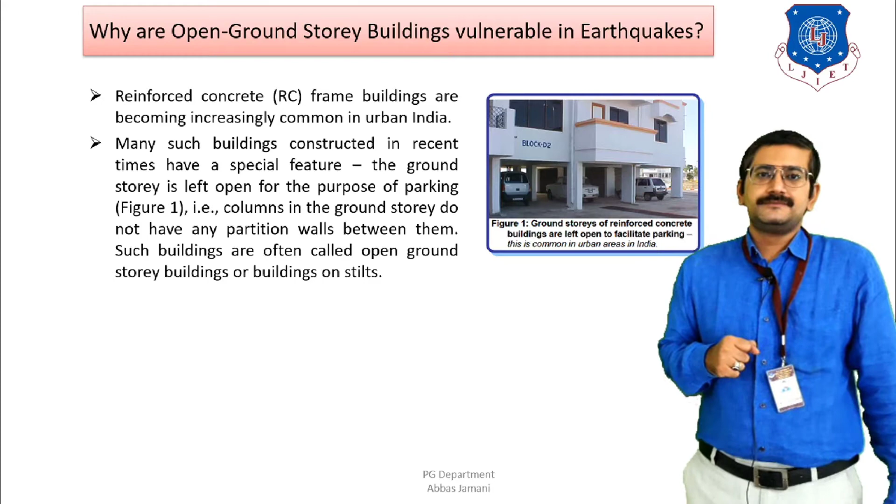Right. So when I talk about the open story buildings, history itself says that the performance of these open story buildings has always remained poor in case of earthquake. If I talk about the 1999 Turkey earthquake or the 1999 Taiwan earthquake or the 2003 Algeria earthquake, in all of these cases it has been observed that the buildings with open ground story have been vulnerable to earthquake, and as a result, a lot of buildings of similar geometry or similar type of planning have collapsed during the severe shaking of the ground.

Right. So this is a scenario that is observed worldwide. But when you come to India, at the local level, we can say that a large number of buildings are coming up day to day in the country as well as in the city. If I talk about Ahmedabad itself, it is said that approximately 25,000 five-story buildings are present, and around 1,500 11-story buildings. Now this is old data.

But if you look at the present situation, the buildings are either 7-story, 12-story or 14-story buildings, and now we even have 22-story buildings. And next we are going to have 30-story and 70-story buildings coming up, right? So a large number of these buildings are coming up on a daily basis, but all these buildings are going to have the same feature, that is, the open story at the ground level. Why? Because parking facility is to be provided, and when this is done, partition walls are absent in this type of buildings.

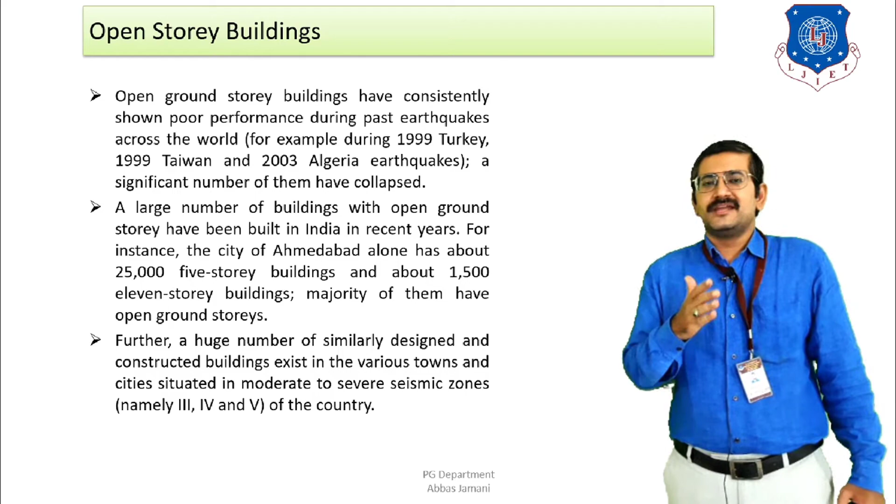I have given the example of Ahmedabad only, but similar types of buildings are coming up in other cities also, that is, buildings located in zone 3, zone 4 and zone 5. All these three zones are seismic prone zones, and any multi-story building with an open story at the ground level is going to be severely affected if not properly detailed or properly designed.

Right. So now what is the actual problem? That is what we are going to understand next. From function point of view it is okay, from elevation point of view it is also okay, but from structure point of view, what is the actual problem, as a result of which we are taking up this topic under the effect of earthquake loads today?

That is, the buildings which are going to have columns at the ground floor and columns and masonry walls both at the stories above are going to have two peculiar features. The first feature is that the ground story is going to be flexible in nature. Why is it going to be flexible in nature?

Because the amount of horizontal displacement that the ground story is going to undergo is going to be larger as compared to the stories above. Why? Because the stiffness at the ground level is going to be less as compared to the stiffness of the stories above. Because in case of the stories from the first floor up to the terrace level, the contribution of infill walls and the columns is going to be a combined effect, and as a result of that the stiffness above is going to increase.

Whereas in case of the ground story, only the columns are going to be present, and as a result the stiffness is going to be less as compared to that of the stories above. And as a result of that, the horizontal displacement is going to be larger at the ground level as compared to the stories above. IS 1893 coins this particular behavior in the structure as a soft story. That is what we have discussed earlier also, that soft story is one of the reasons why open story buildings cannot perform sufficiently in case of earthquake loads.

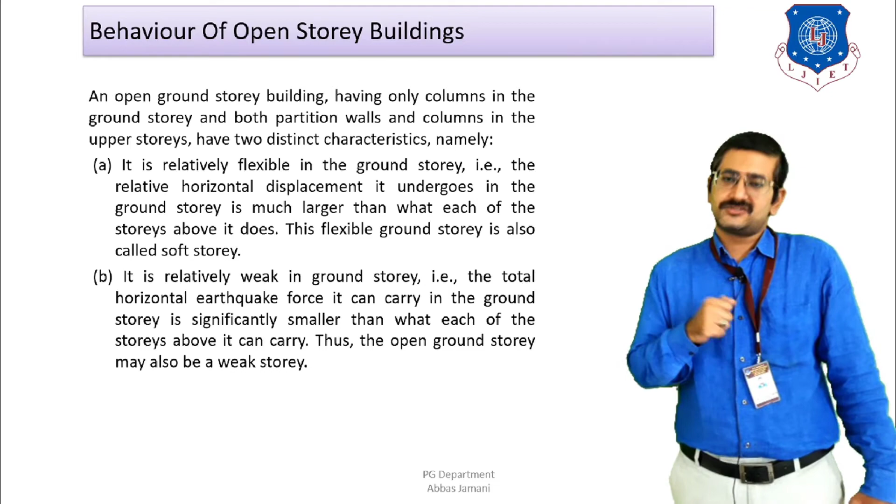Now, when the geometry is such that there are only columns at the ground floor, and from the first floor onward both columns and walls are there, the above stories are going to act as a single unit or a single block, and they are going to move together under the application of lateral loads. Whereas in case of the ground floor, only the columns are present, and the movement is going to be like that of an inverted pendulum, which we will see in the figure that I am going to show in the next slide.

So when these horizontal forces act on the building, the building is going to undergo horizontal displacement, and we have discussed that in case of lateral forces, reversal of stresses is going to be considered. That is, the earthquake force is likely to act in the plus direction and the minus direction as well, so there is going to be back and forth movement. This back and forth movement is going to severely affect the strength of the columns at the ground floor, and at the same time it is going to affect the ductility of the columns as well.

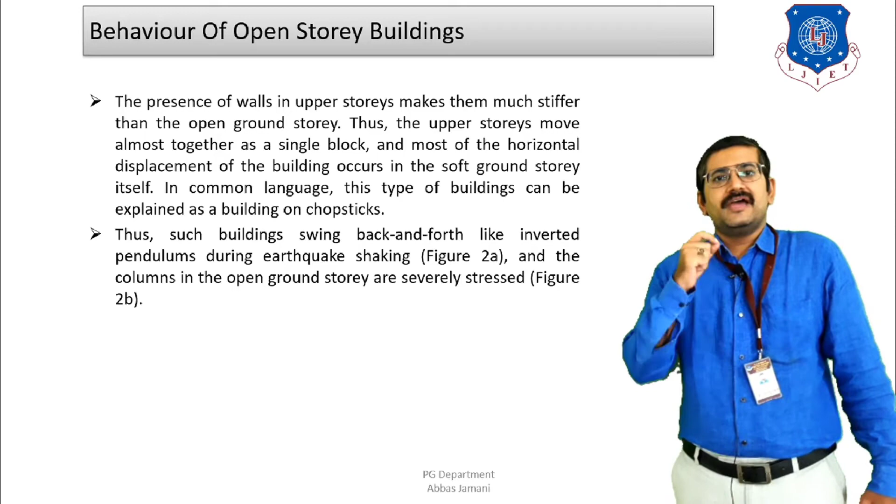So the columns are going to be severely stressed from ductility point of view and also from strength point of view when this type of geometry is seen in the building. As you can see in the figure over here, first the figure of an inverted pendulum is shown, where a single circular bar is shown, and on top of that the mass is shown.

Now if I apply a horizontal force on this pendulum, the stiffness of the bar is going to be different and the stiffness of the ball is going to be different. As a result, the heavier mass is concentrated at the top, so stiffness is going to be more at top, less at bottom. The behavior is going to be as you can see in the figure over here.

The same thing applies in the case of open story buildings. The stiffness at the ground floor is going to be less, and the mass is going to be more at the upper stories. So the stiffness is also going to be more at the upper stories, and since it is more compared to the lower stories, the behavior is going to be similar to that of an inverted pendulum, as you can see.

The upper portion of the block is going to act together as a single unit, and the lower portion of the building, that is the ground story columns, are going to be on the weaker side, and their flexibility is going to be larger compared to the portion above the ground story.

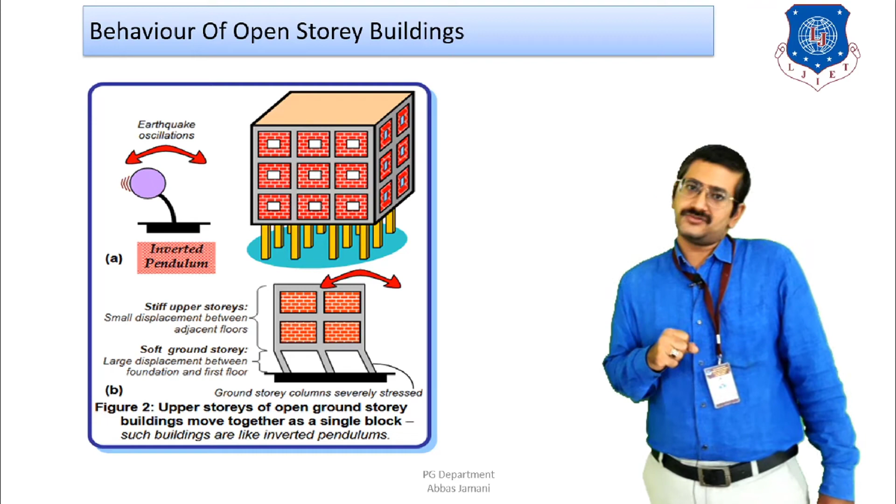Now when this happens, the demand on the column is that it should be capable of resisting large lateral forces. That is, the shear capacity of the column should be on the higher side. The second thing is, a good amount of ductility is also required.

Why? Because the ground story is going to be flexible in nature, and it is going to undergo back and forth movement. With that back and forth movement, large lateral deformation will take place in either direction. If sufficient ductility is not there, it will not be able to hold its position, and the collapse of the structure is likely to be initiated.

In the previous discussion regarding the performance of masonry buildings and RCC buildings, we have seen that the design of the column was critical in shear only. That is, the shear capacity of the column should be increased. But in the case of open story buildings, the criteria change. The columns need to be ductile in nature, and at the same time they should have good shear strength, to resist such a large change in the stiffness.

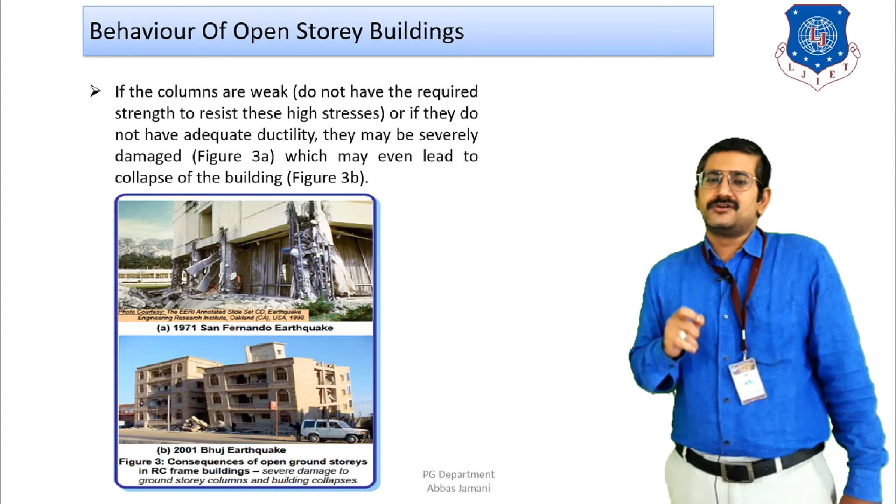Here you can see examples of the performance of two buildings in two different earthquakes. The first is a building that collapsed in the 1971 San Fernando earthquake, and the second is a G+3 structure that collapsed during the 2001 Bhuj earthquake. In both cases, the open ground story was present where the parking facility was provided, flexibility was generated in the ground story, the buildings could not perform well under lateral loads, and failure of the structure took place.

Now, where actually is the problem? One problem, as we have already seen, is the insufficient provision of masonry walls. If a sufficient amount of masonry or infill walls is not provided at ground level, it is going to create a problem. The second problem is at the design office level. Why?

Because as you can see in the figure, in the actual building the frame structure is going to be there, where the major load transfer is going to take place from the beams to columns and from the columns to the foundation and to the soil below. And between these columns, the masonry infill walls are going to be there. So in the majority of buildings, you will see masonry infill walls.

This element is going to be present irrespective of the functionality of the building, whether it is a residential building, commercial building, institutional building, whatever type of building. The walls are always going to be present from the functional point of view and from the privacy point of view also. So as a result of that, these walls are never going to be eliminated from the structure.

But what happens is that when this particular structure is being modeled in the design office, the effect of the masonry infill wall is not considered. That is, the structure is modeled as a bare frame structure. When you model this structure as a bare frame structure, the effect of the inverted pendulum that we have seen in the earlier slide cannot be visualized in the design office.

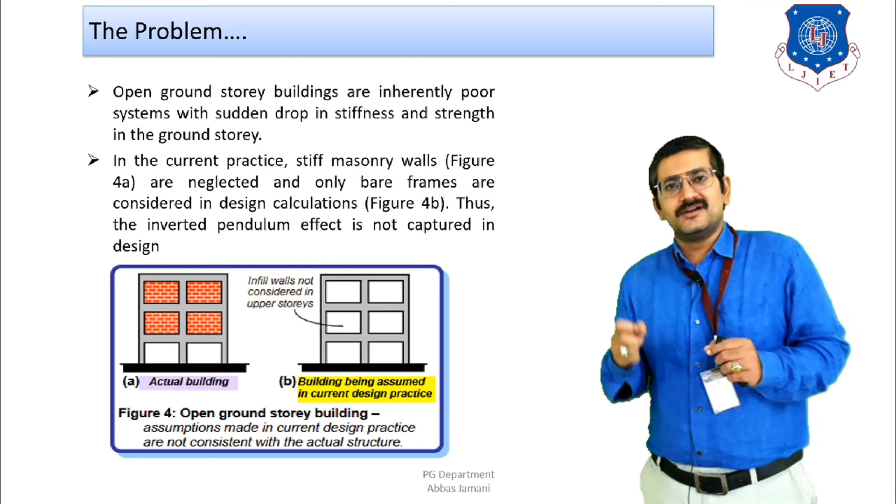And as a result of that, whatever assumptions we are making in the design office are not falling in line with the actual performance or the actual condition that is going to be there on site. So this is also one of the additional problems which needs to be addressed by the structural engineer in the design office as well.

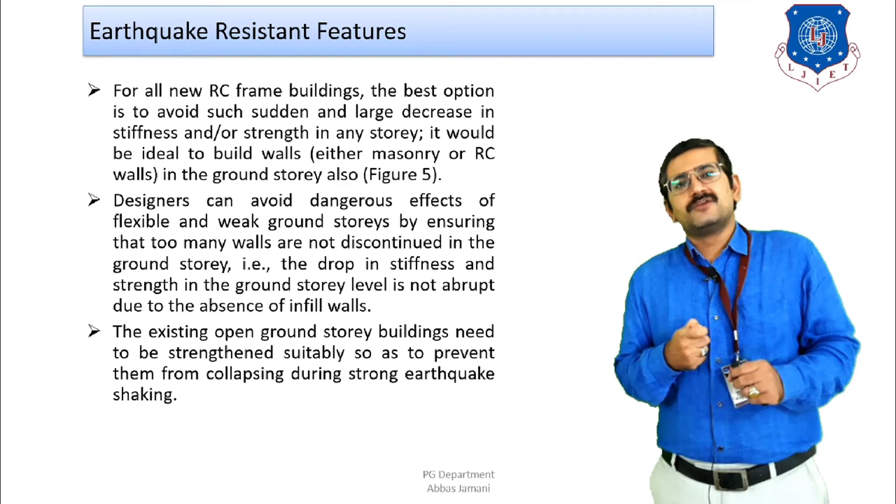Lastly, the question is, what is the solution to this problem? We cannot close the ground story from all sides by introducing masonry walls and completely eliminate the parking. That is not a possibility, because then how will the movement of vehicles take place, or the movement of the persons living in the building? So complete closure of the peripheral boundary is not an optimum solution for the ground story.

But what we can do is, if you are going to put a new project on site, then from the planning stage itself this aspect should be taken into consideration. A mutual discussion should be held between the architect, the structural engineer and the developer. And the structural engineer needs to brief the architect as well as the developer regarding the consequences if this building is designed with an open ground story.

So once the client is also educated, I'm pretty sure that some viable solution will be worked out by the developer and the architect, and some modification will be done in the planning. So if you are going to put up a new project, the first suggestion is that discontinuity in the wall should be avoided, and the open ground story, or the soft story or weak story, should be totally eliminated from the building.

Now, how can this be totally eliminated? You do your calculation for the parking and allotment of vehicles, and you put sufficient provision in the basement itself. That is, you plan your project in such a manner that the basement itself is capable of accommodating all the vehicles that are likely to be there in this campus. So that is how proper planning will help us to eliminate this problem to some extent.

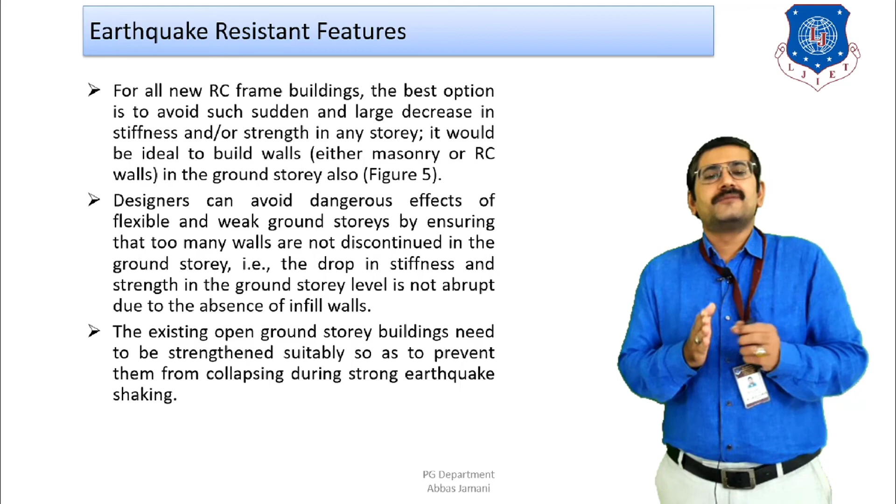So whichever buildings have this weak story or soft story effect should be cross-checked again as per the guidelines of IS 1893, and if required and found that these columns are deficient in carrying the lateral forces as mentioned by IS 1893, then the shear capacity of these columns should be enhanced by adopting any of the retrofitting techniques that are available in the market.

Now, in order to get an idea about the retrofitting tactics, a qualified structural engineer should be hired, and he should be assigned the task of reviewing the entire design of the building, taking into consideration all the clauses related to soft story and weak story mentioned by IS 1893. That is, approximately 2.5 times shear should be applied on the soft story, and the performance of the building should be checked. Once this is done, the appropriate retrofitting technique should be adopted, and these buildings should be enhanced before a major collapse or calamity is observed under lateral loads from earthquake forces.

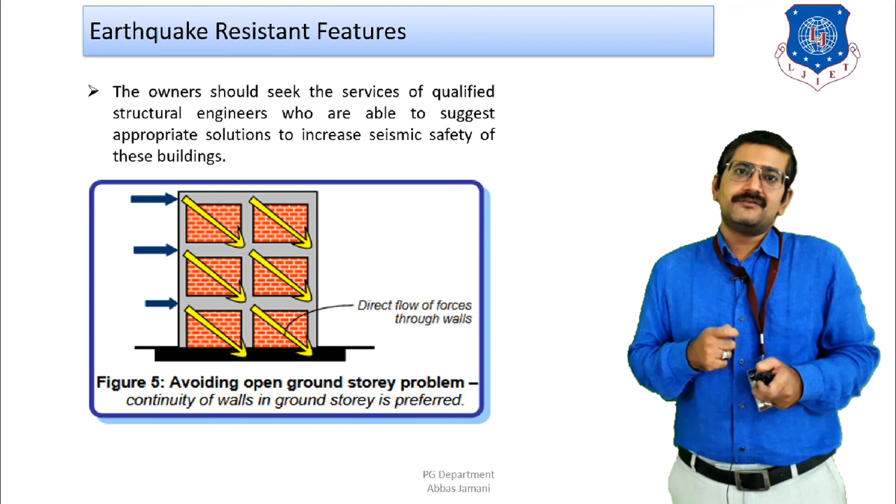So that is why the consideration of infill walls in the design office, at the planning level and execution level, is going to play an important role in the performance of open story buildings when subjected to lateral loads. I hope you have understood the importance of provision of masonry walls in these open story buildings in order to enhance their performance under lateral load.